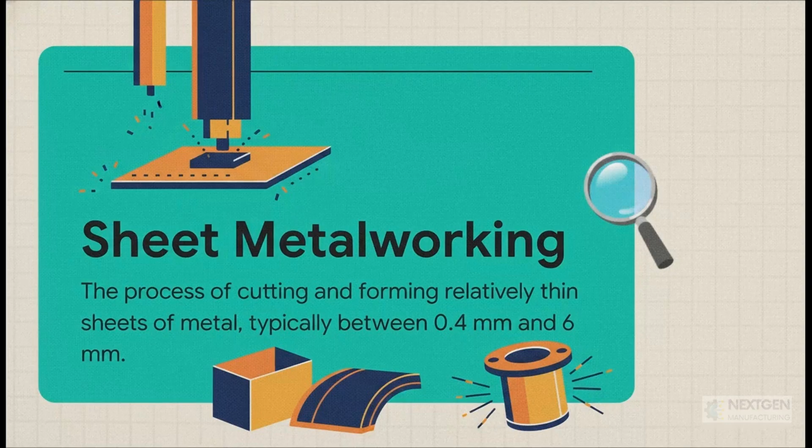So what exactly are we talking about here? Well, at its core, sheet metalworking is all about cutting and forming metal that's pretty thin, usually less than 1/4 of an inch thick. You know, if it gets any thicker than that, we stop calling it a sheet and start calling it plate. And most of these processes happen at room temperature, which is why you'll often hear them called cold working.

So to really get a handle on this huge and super diverse field, we can actually break down almost every single operation into just 3 basic fundamental transformations. This is the secret sauce. It's how we go from a boring flat sheet to a complex, useful part. It's a simple recipe, really.

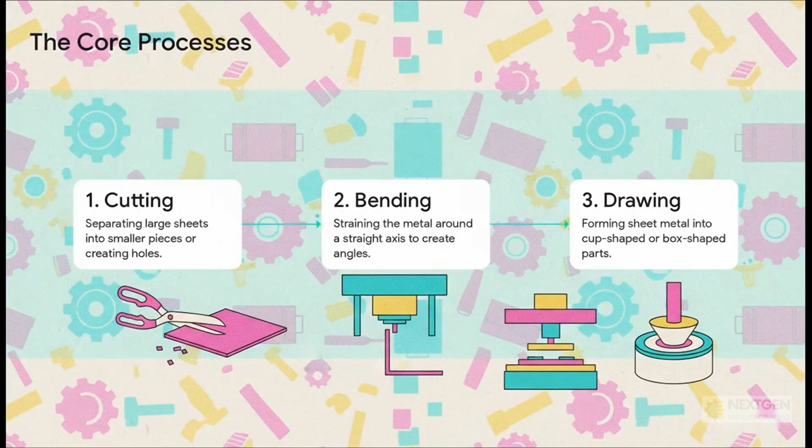First, you've got to cut the metal into the basic shape you need. Then, you bend it to create angles and give it some real structure. And finally, for those more complex shapes like a sink or a can, you draw it to create depth. Cutting, bending, and drawing. So, let's break them down one by one.

Okay, first things first, cutting. Before you can bend or form anything, you have to separate your piece from a bigger sheet or a giant coil of metal, and that process is called shearing. Now, what's really wild is that this whole shearing thing happens in the blink of an eye. But if we could slow it way down, this is what you'd see.

First, the punch presses down and just deforms the metal a bit. Then it penetrates, cutting maybe about 1/3 of the way through. That pressure starts a crack from the top edge and the bottom edge. And if everything is set up just right, those 2 cracks race toward each other and meet perfectly in the middle for a clean break.

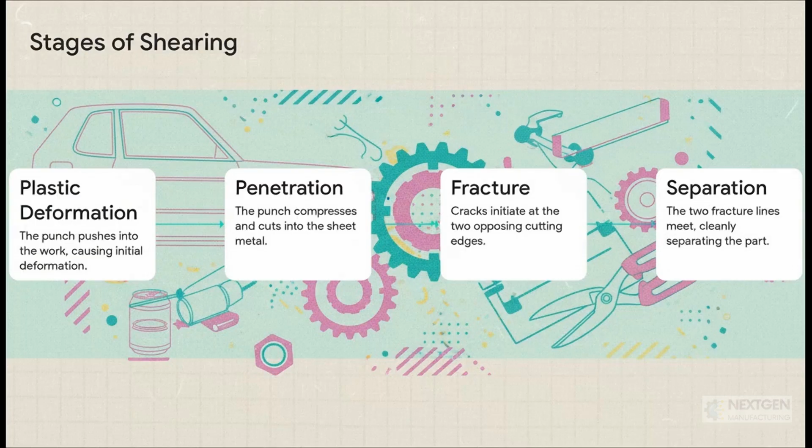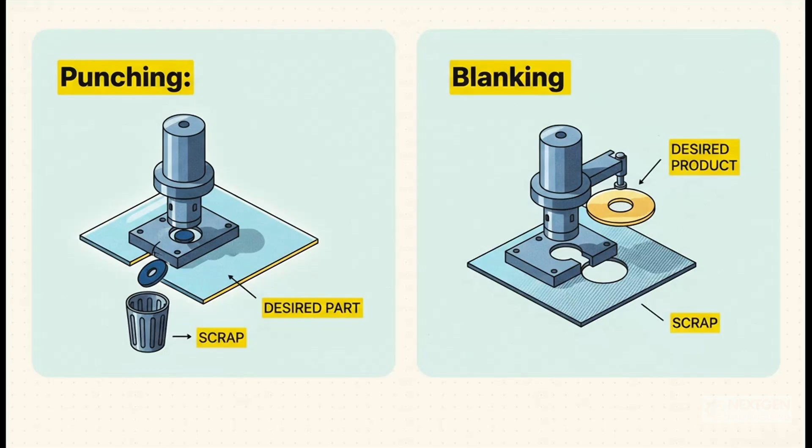Now, inside the world of cutting, there are 2 key operations that sound alike, but they're actually total opposites: punching and blanking. Think of it this way. With punching, you're making a hole. The sheet is your part, and the little piece you cut out, the slug, that's the scrap. With blanking, it's the reverse. The piece you cut out, the blank, that's your part, and the sheet around it is the scrap. It all just comes down to which piece you're planning to keep.

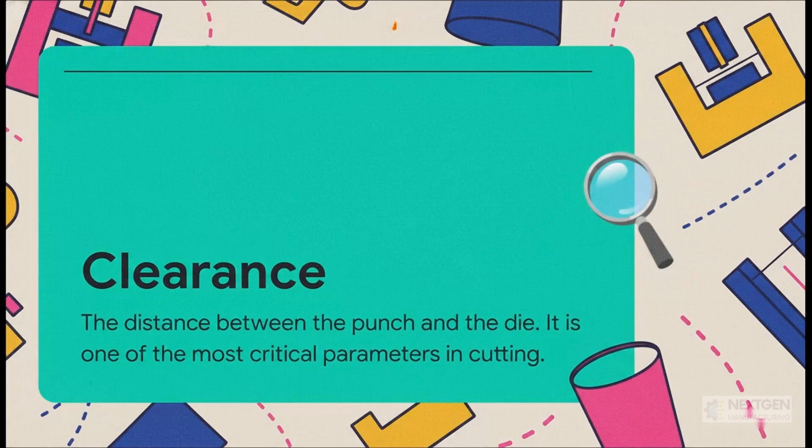So the real secret to a perfect clean cut is this one little thing called clearance. It's the tiny gap between the punch and the die. And no, it's not like a pair of scissors where the blades touch. This space is put there on purpose, and getting it right is absolutely critical. Because getting this clearance right is everything.

If the gap is too small, those fracture lines we talked about won't meet up cleanly, and you have to use a ton of extra force. But if the gap is too large, the metal kind of gets pinched and torn instead of sheared, leaving this nasty, sharp edge called a burr. That perfect clearance, we're talking just 4 to 8% of the metal's thickness, is the key to a beautiful cut.

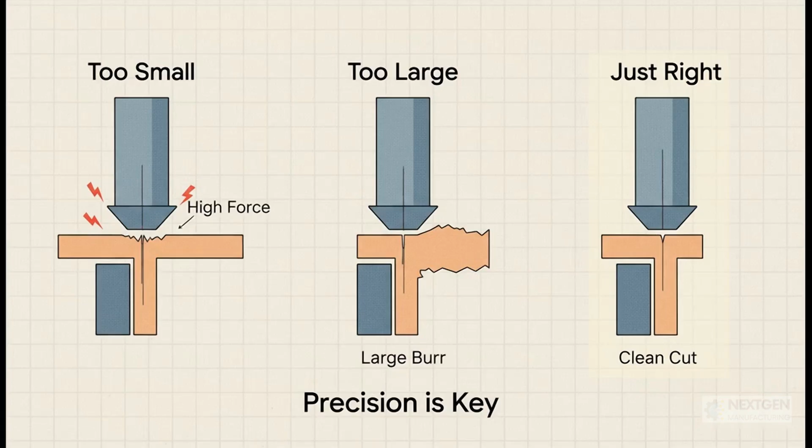All right, let's move on to our second transformation. Once we have our flat blank all cut out, we need to give it some strength and structure, and we do that through bending. Okay, so when you bend a piece of sheet metal, something really cool happens inside the material. The metal on the inside of the corner gets squeezed together. It's compressed. At the same time, the metal on the outside of the corner gets pulled apart. It's stretched.

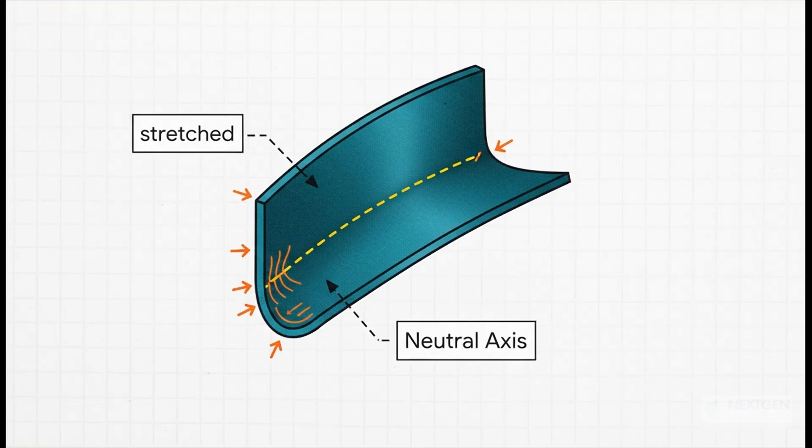And right in the middle, there's a line called the neutral axis that isn't doing either. This internal stress is what locks in that permanent shape. But here's the catch. Metal has a memory. After you bend it and let go, it wants to return to its old flat shape just a tiny little bit. This elastic recovery is called springback.

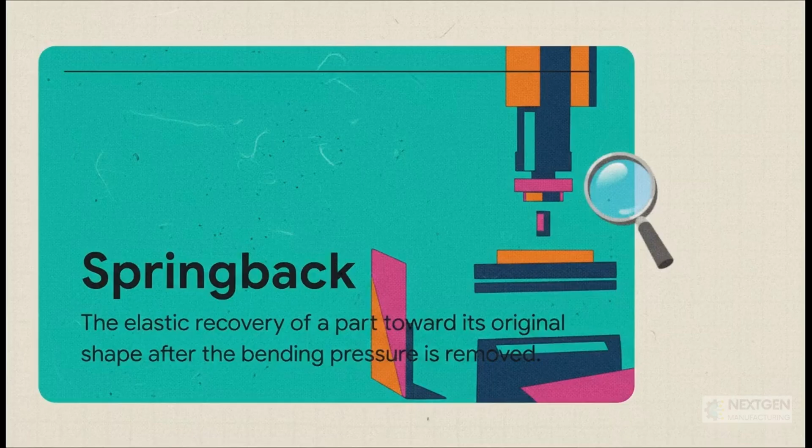So you might bend a part with a perfect 90-degree tool, but when you pull it out, it relaxes to, say, 92 degrees. And in next-gen manufacturing, 2 degrees isn't a small error. It's a disaster. That's the difference between a car door that seals perfectly and one that whistles like crazy on the highway. So how do you fight springback?

Well, you outsmart it. Engineers use these really clever techniques like overbending, where they'll actually bend the part to 88 degrees, knowing it'll spring back to a perfect 90. Or they'll use a method called bottoming, where they give the metal an extra hard squeeze at the end of the press stroke to kind of shock the memory out of it and set the bend for good.

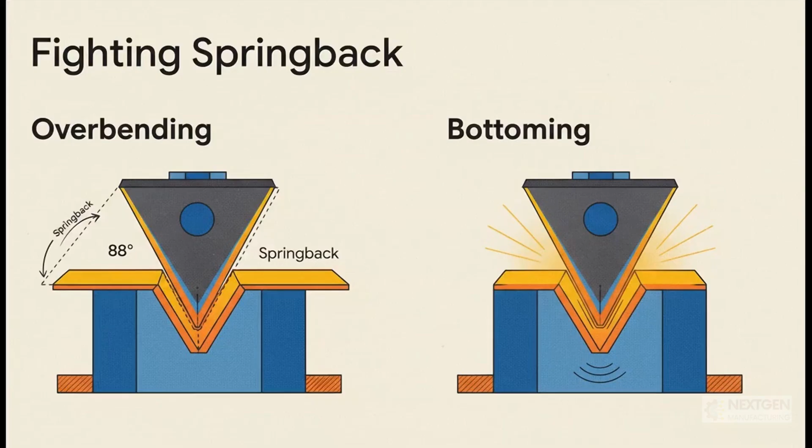All right, on to our final transformation, and this is where we go from 2D to full-on 3D. How in the world do you take a flat, circular piece of metal and turn it into something deep and seamless, like a cooking pot or a soda can? The answer is a process called drawing.

Drawing is where a punch literally forces a flat sheet metal blank down into a die cavity. The metal isn't just being bent here, it's being forced to flow and stretch and compress all at once as it gets pulled into this new 3D shape. It is, without a doubt, the most complex of the three core processes.

So, to figure out if you can even make a deep part without it ripping apart, engineers use a critical measurement called the drawing ratio. And the magic number is right here, 2.0. This ratio compares the size of the flat disc you start with to the size of the punch that forms it. If that ratio gets much bigger than 2, you're asking the metal to stretch too far, too fast, and it's pretty much guaranteed to fail by tearing.

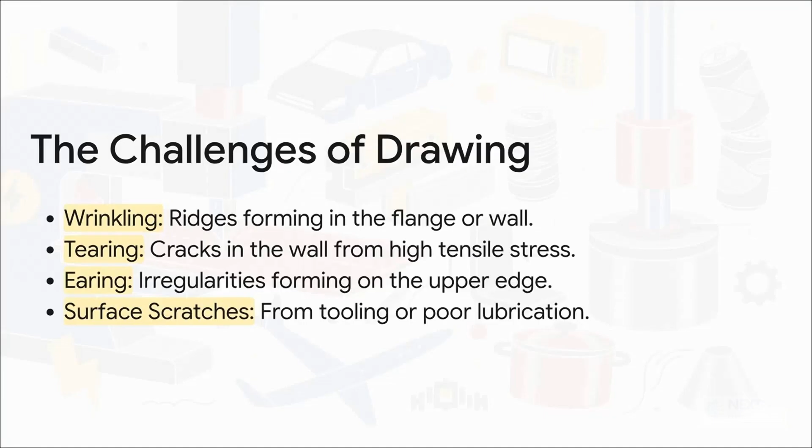And trust me, a lot can go wrong. If the forces aren't balanced perfectly, you can get wrinkling in the walls, you could get tearing near the bottom where the tension is highest, or you could get something called earing, where the top edge becomes all wavy and uneven. It just goes to show you how much science is packed into making even the simplest looking can on the shelf.

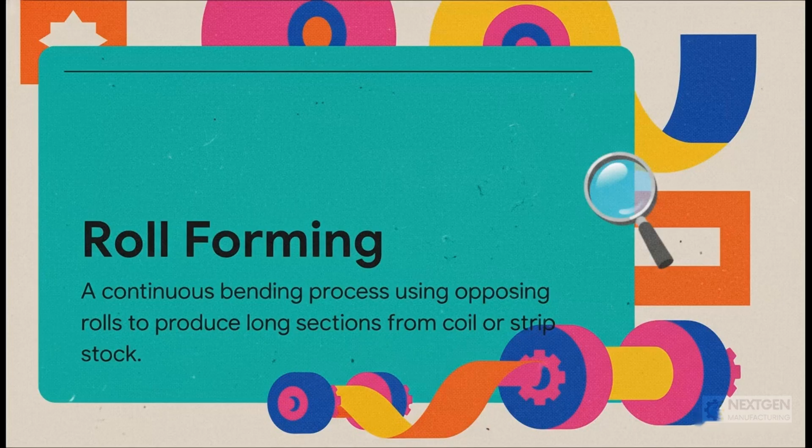Okay, now that we've nailed down the big three, cutting, bending, and drawing, let's check out a quick bonus round of a few next-level forming processes that show just how incredibly versatile sheet metal can be. First up, roll forming. Imagine a giant ribbon of steel, miles long, flowing through a factory. Instead of one big bend, this process uses a whole series of rollers that progressively and gently shape that continuous coil into a complex shape. If you've ever seen long pieces of metal siding or rain gutters, that's roll forming in action.

Next up is spinning, which is basically like a potter's wheel, but for metal. You take a flat metal disc, spin it at super high speed, and then a tool presses against it, flowing the metal over a mold, which is called a mandrel. It's the perfect way to make symmetrical, curvy parts, like the nose cone on a rocket or the bell of a trumpet.

And finally, we've got to talk about one of the most powerful and frankly, coolest methods out there, explosive forming. Yes, you heard me right. Explosives. You literally detonate a charge underwater, and the shockwave from the blast slams a huge sheet of metal into a die with unbelievable force and accuracy. It's the go-to method for making massive, complicated parts, especially for the aerospace industry.

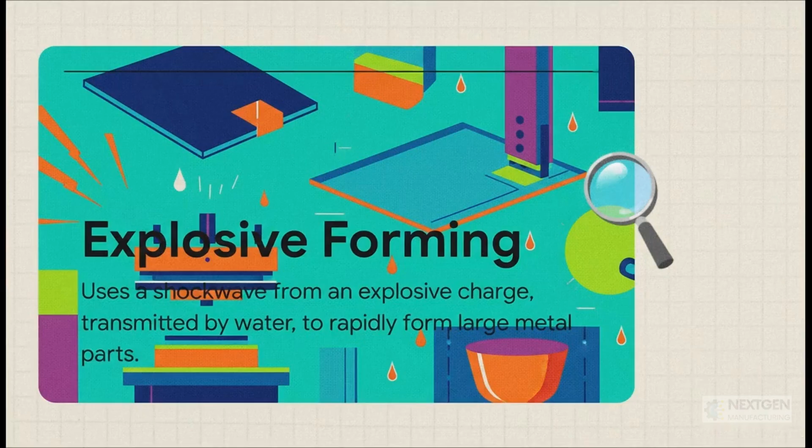So there you have it, from a simple shearing cut to a precise 90-degree bend to a deep, complex draw and even using an explosive blast. These are the invisible processes working behind the scenes. They are what transform simple flat sheets into the strong, lightweight, and affordable metal parts that build our modern world.

So the next time you pop open a can, get in your car, or grab a pot from the kitchen cabinet, I want you to take a closer look. Will you just see a simple object, or will you see the incredible journey it took of cutting, bending, and drawing, the hidden engineering that gave that object its shape and its purpose?